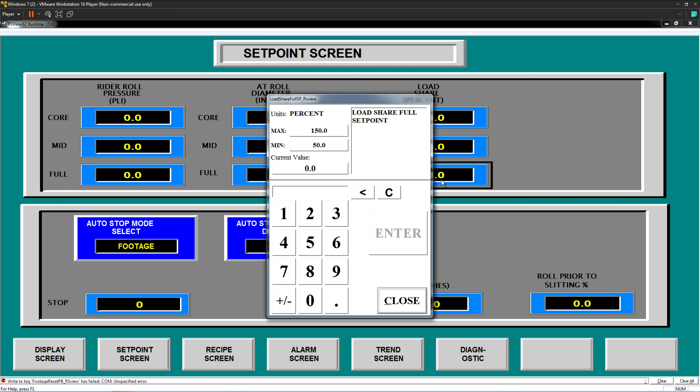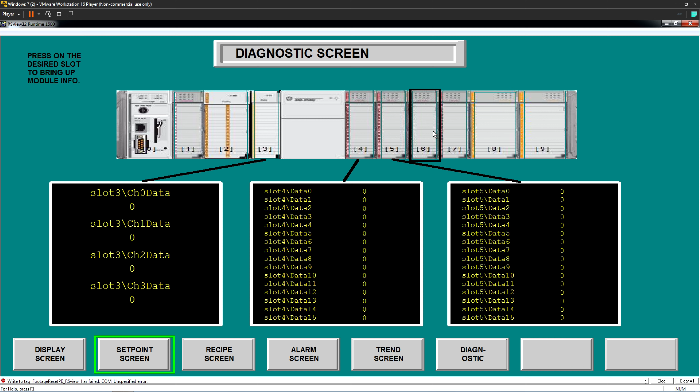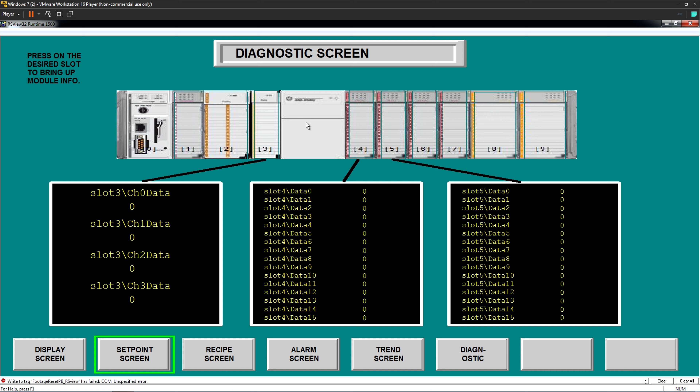You've got what slot, you've got what channel, and you've got the data, but when you look at your digital inputs, you've got slot and channel, and whether it's on or off, but you have no idea what that is. It's a guessing game, same with your outputs, as to what it is. I mean this is a high-speed counter, and it says count, but you really wouldn't know that. You wouldn't know that this is an analog input, other than looking up here at the picture, which isn't real clear anyway, but I digress.

Anyway, so what we'll do is we'll pop over here to the C-More software. So here's what I did. Now this is a pop-up window - it has to sit there, but we'll go into simulate mode here in a minute and I'll show you exactly how this runs. But what I want to talk about is some of the more in-depth features of the C-More.

What I mean by that is like the event manager. Now I only used it in a couple places on here, but it was able to solve a couple problems and make things happen the way I needed them to. I'll show you the screens first - this is your display screen. Like I said, this is a pop-up screen. It's just there. It's not there when we're in actual running.

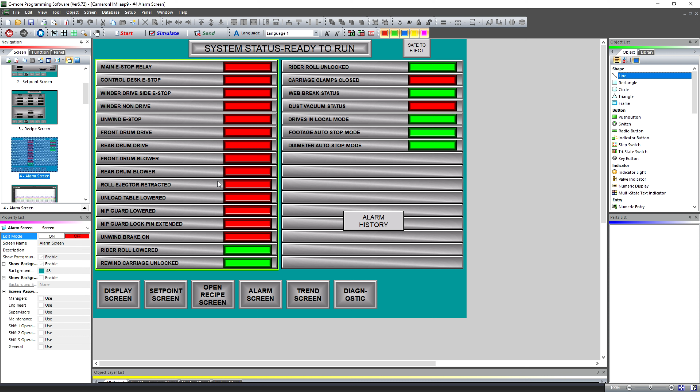The set point screen, well, I'm going to have to - my bad, I'm not in simulate right now. The set point screen looks like this, pretty much like the other one did. The alarm screen looks like this, pretty close to what they had, and the same stuff's there, but a little flashier, looks a little better I think.

I did build a trend screen, the calibrate screen. The diagnostic screen's where I really kind of went above and beyond.

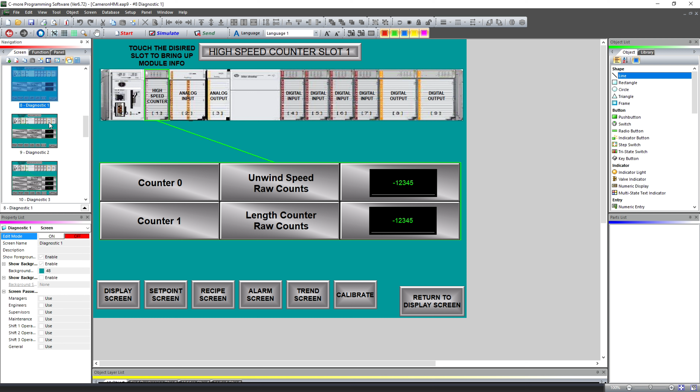So granted, I've got 9 different screens for this, but behind each of these there's a hidden button, and I overlaid the text to let you know what each one is. You've got a high-speed counter, analog input, analog output, digital input, so on and so forth. For each one of those, I did a different screen, and you can see it's telling you what it is, telling you what specific data you're looking at, and so on and so forth.

And when you get down into your digital inputs and outputs, I tried to give more data. Basically, it was so arbitrary on that other one - yeah, you'd know whether that input was on or off, but you didn't know what you were looking at. So if something wasn't made, you were kind of in a guessing game or having to jump to documentation to figure it out. And I think this makes it a whole lot cleaner.

And this is that actual pop-up screen that we saw on top of the display screen. So if we go into simulate, it'll pop up, and I've got it up here on another screen. I'll bring it down where I can trigger and change values and whatnot while we're simulating.

The big thing I want to show you, and it's nothing that can't be done on other HMIs, it's just the way to handle these problems in the C-More.

If we look over all the screens, the first thing I'll point out is whenever you hit that reset footage, you get that pop-up. You hit yes, it resets the footage and goes away. You hit exit, and it just goes away.

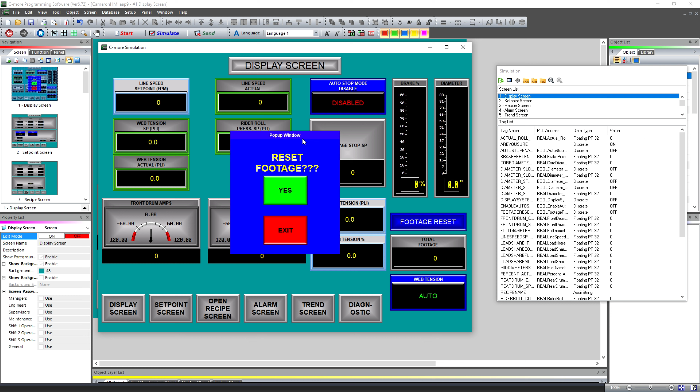Doing that was actually a little bit of a trick. So we'll go back into the program real quick here. Turn that off for a second. Your footage reset button is actually a push button, and it's triggering an internal tag. Let's go with internal, and it's called Are You Sure.

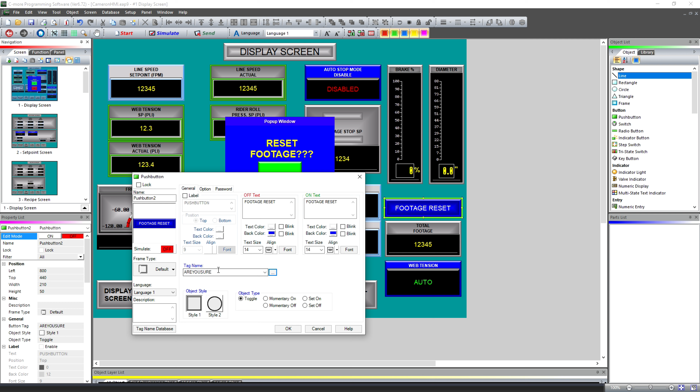It's an internal discrete tag, so it doesn't go to the PLC. It's only in the database inside of the HMI. So whenever you push that footage reset button, I'm toggling that Are You Sure bit on in the HMI. If you come up here to this pop-up window, you'll see what turns this pop-up window on is that Are You Sure bit.

So when you hit this button, your footage reset, it triggers that Are You Sure bit, toggles it on, and pops this up. So down here, on exit, all I'm doing is toggling that Are You Sure bit off. Simple, because that will make that go away.

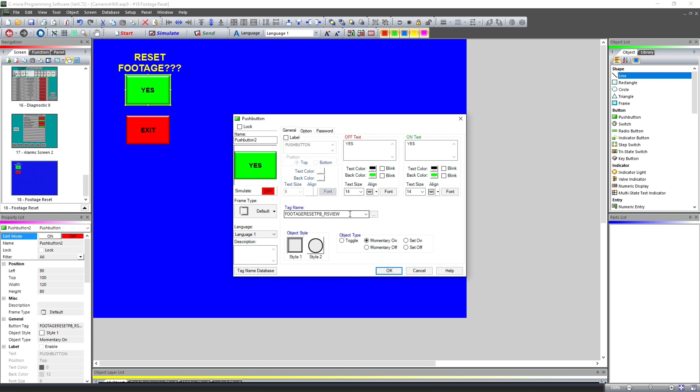But on your footage reset, we need to actually reset the footage, right? And that's a momentary, that's not a toggle. But without some additional action, we wouldn't exit from that pop-up. The pop-up would still be there because there's nothing telling it to go away. We're not toggling that Are You Sure bit back off.

So what we did there to make that happen, we went into the event manager and hit tag event, and we double clicked here. So when that footage reset push button RSView bit is triggered, it turns that Are You Sure bit off. Simple, I know, but it's a way to make multiple things happen by pushing the one button.

Otherwise, you can't do that. If you tried to put a screen change button there or something along that line, it's not going to work, because the screen change push button is just a screen change push button, and you can only hit whatever's on top. You can't hit multiple buttons at the same time. You get what I'm saying.

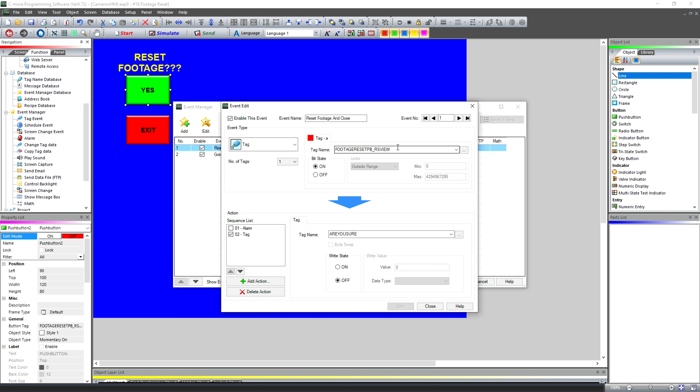But this here, when this bit goes high, the footage reset bit goes high on, it toggles or turns this Are You Sure bit off, thereby closing that pop-up window. I hope that makes sense. And once again, this one simply toggles that Are You Sure bit, which is what brings that pop-up, off. So it was a way to make sure that you're able to reset the footage and you're able to back out of that screen whether you hit yes or you hit exit.

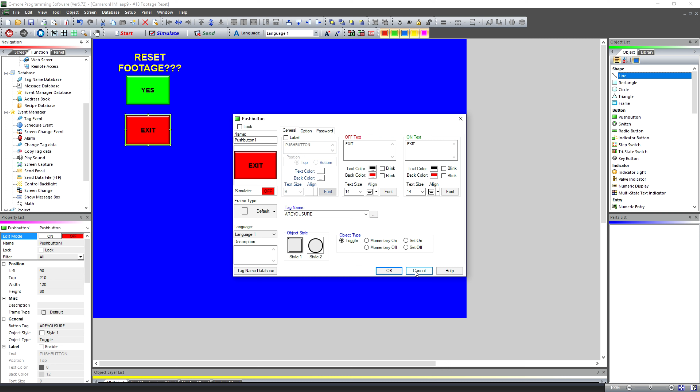Okay, so we're going to go back into Simulate real quick. And a problem that I didn't even know existed on these HMIs until I wrote this one and we started testing it, me and the operators.

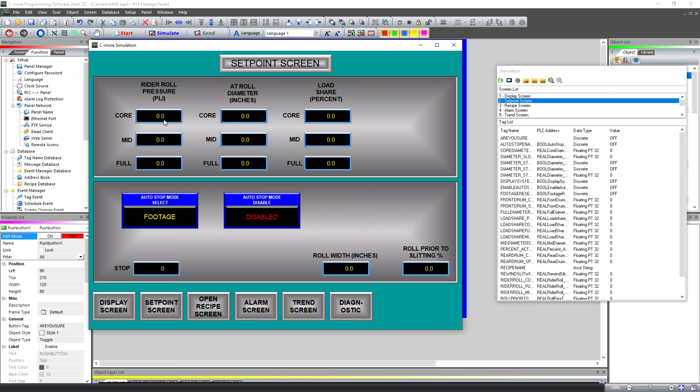When you open a keypad on these HMIs, let me actually go to the set point screen and do it. When you open a keypad like this, that keypad is now a new window popped up over the top of the set point screen window. So this is a window all its own.

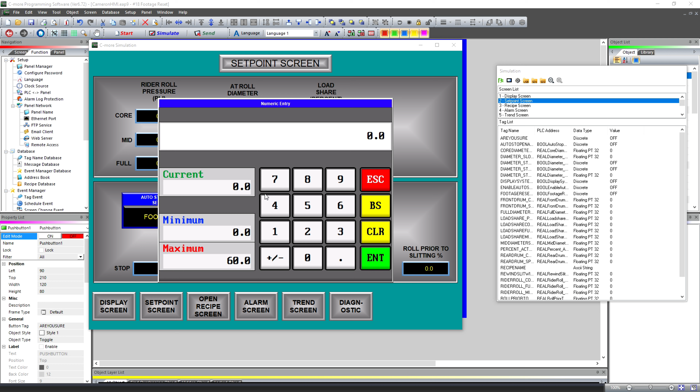And what I didn't know until this project, because I'd never run across it being a problem before, is everything behind that freezes. Now on here there wouldn't really be any live data because this is just set points, so it's not a problem. But if there was live data back here, it all freezes because this becomes the active window. So everything behind, on the screen behind the keypad, freezes right where it's at. Now once you hit escape, it'll instantly catch back up.

And on the display screen, the problem they had with that was they needed to be able to see this total footage when they come up here to line speed, because they'll start slowing down once they get up to a certain point because they like to run in manual. So what I did, if I hit this, you're going to notice something a little weird.

You're going to see a keypad pop up that I actually built manually. Notice that this display screen came up, but it's kind of popped down and you can kind of see the other one behind it. Well, this whole screen right here is a keypad. It's designed as a keypad. The keypad portion is here, but all of this back here is part of that keypad screen. And I'll show you how I did that.

But what that did, now when you pop that keypad up, everything back here stays live. You can still see your diameter coming up. You can see your total footage coming up. Everything that's showing live data that's not blocked by the keypad, obviously, you can still see. You can still see the amperage on your motors down here.

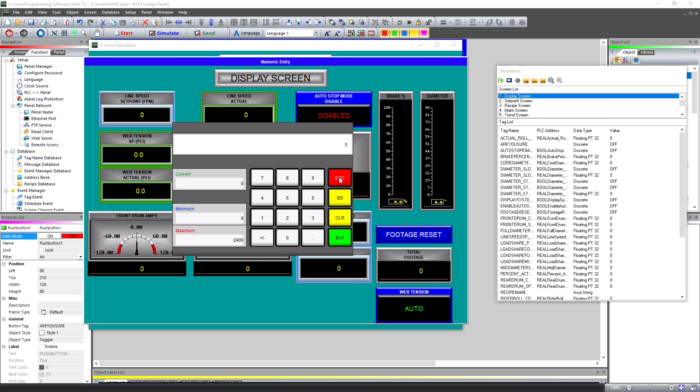And it kind of stumped me for a minute because they said that they had that problem on the old RSView program at one point, and then they had updated the computer or updated something. This was prior to me, and it went away, and it started staying live behind the keypad. So I had to figure out a way to fix that.

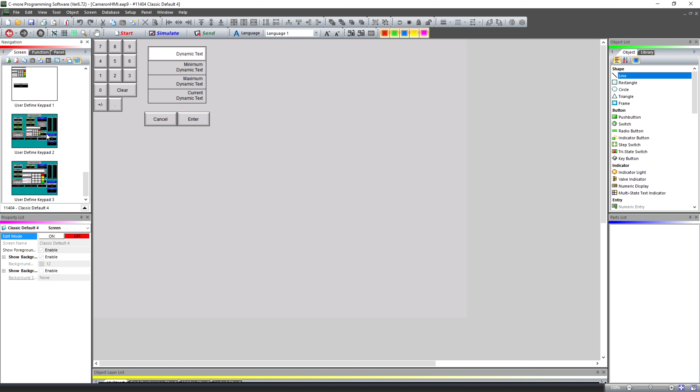What I did, if we come back over here to screens, and over here on the left here, that's your user define keypad. So all of your keypads are in here. You've got default 0, 1, 2, and so on, and then you've got the classic style, which looks a little more like an Allen Bradley. And then if you get down here at the bottom, you'll notice I built two. This one here was the first one I did, and we have one operator whose eyesight's not the greatest, so he needed this to be a little bigger. And I built this.

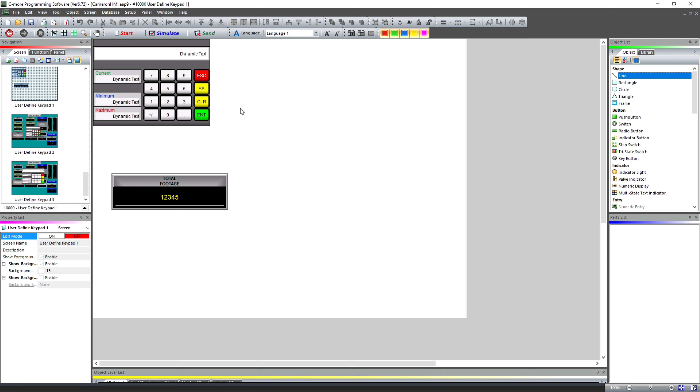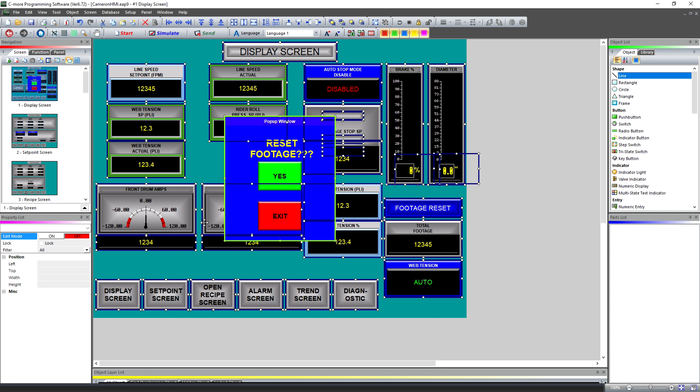But literally what I did, and I'll even show you here, we'll leave that keypad for the moment. We'll get rid of this. We'll go back to our display screen and we will grab everything. Now it's not going to grab that pop-up because that's a completely separate deal. But we're going to copy that whole screen, every element on it. Now we'll go back over here to our define keypad and we'll come down here to that user define keypad 1 and we'll paste that entire screen just like that. So we just duplicated that screen. Now I'm going to undo that for a second just to show you something.

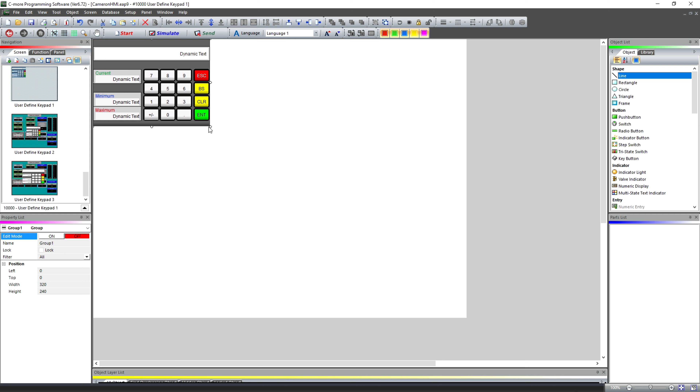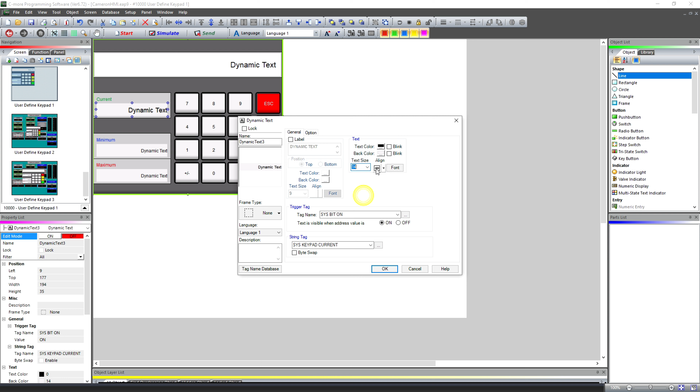We want to take this, we want to right click, and we want to group everything in it. That way we can blow it up bigger. And then the best way to handle it is to go in and change all of your text sizes to something a little bigger. And your number sizes, I'm not going to do all of them right now, I'm just kind of showing you what I did. And I actually usually go in and change the font. I get rid of the default font and I make them bold. Makes them stand out a little better on the screen.

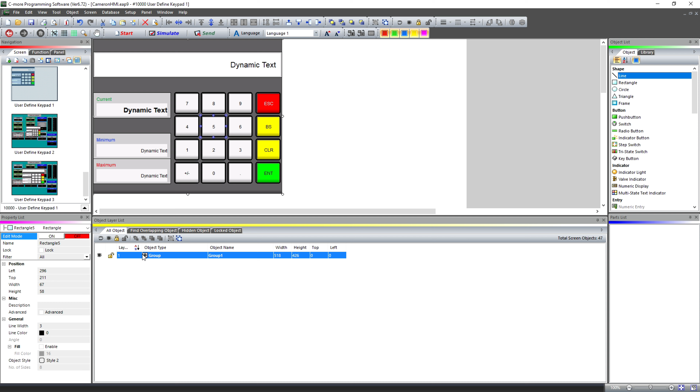You go into your number here. That's going to pop up the rectangle because the rectangle's on top. So what we'll do is we'll pull up our display list just to show you how to do it here. We'll blow out that group and we'll go into key button, double click it, and that's the plus minus key. We'll make that bigger, make it bold.

And you just go in and do that with each one. See, you can get to everything right down here in this pop-up. We got the other key buttons down here. Double click it, you'll see which one it is. That's the 5. Make the number bigger. Go in if you want to make it bold, if you want to italicize, if you want to change the font. You can do pretty much whatever you want. There's a lot of power and a lot of functionality in here, but you see the difference. You see how it's going to change once you get all of those done.

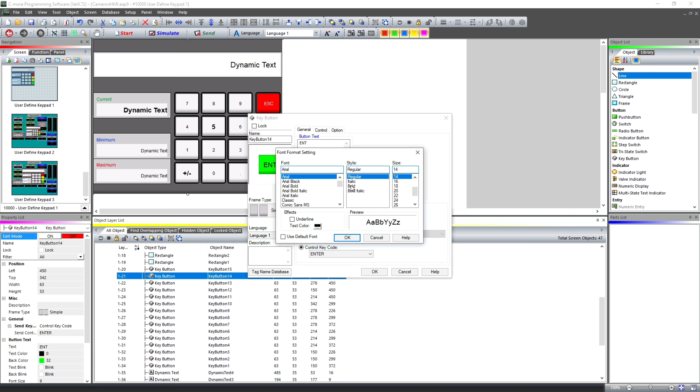I don't know why I double clicked that. Let me find one of those colored keys over there to the side. Oh, sorry, those are all numbers. And they must be up here. Nope, it's got to be one of them. Let's see, let's go down through here and find. There's one. We'll do the enter key just to show you what it looks like on there. Make it a 14, make it bold. And you can go in and change your initial preferences on this kind of stuff. I just kind of leave it and change it as I go. But you see where I'm going with that. So we'll drop this back down out of the way.

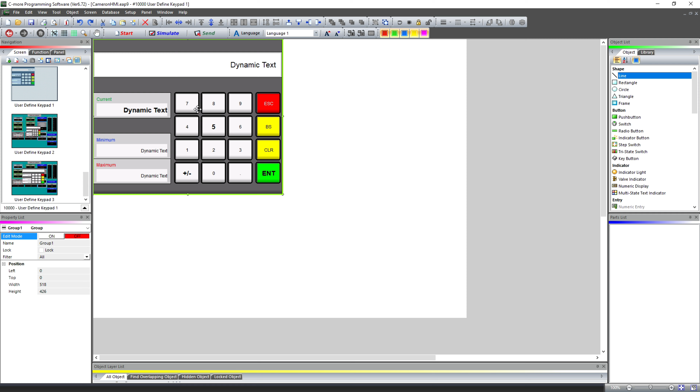Okay, so before we paste all of our other stuff in here, we'll go ahead and drag this down to the middle. But what I want to do right now is get it where I want it, sized how I want it, and then we will go ahead and paste. You'll notice that it's all going to be up on top of there.

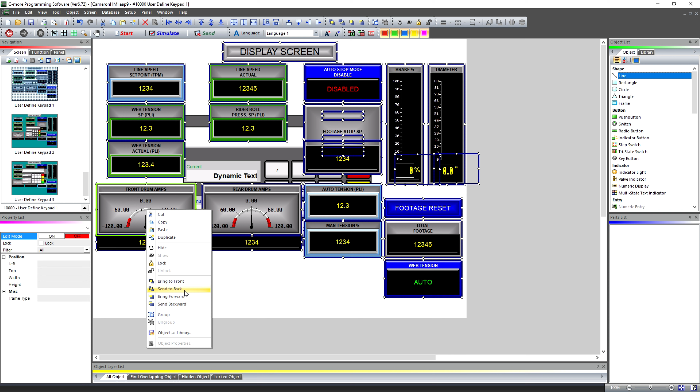So before we undo all that, we're going to right click and send that to the back, which will bring our keypad to the front. Then we can move our keypad where we want it. That's literally how I built that custom keypad screen so that the data would stay live even when the keypad was popped up. That was just to show you how I built it.

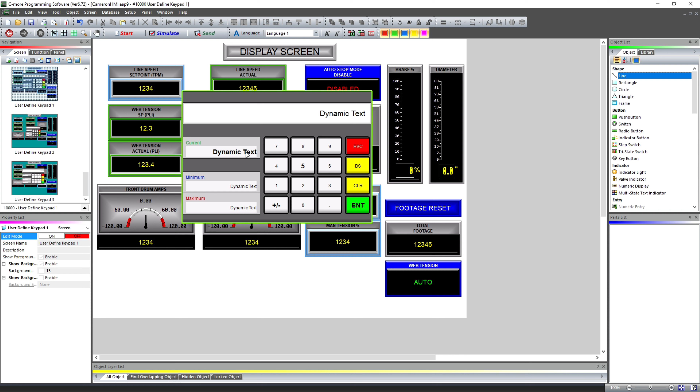And it ended up looking just like this. Wait a minute, is that the one? Yeah, I don't have my most recent saved copy on here because I did go in and change all that text after the fact. It's all bigger now, much, much bigger. I thought I had the most recent version saved on here, but apparently I don't. On the actual HMI that's in production right now, it is bigger text and it looks really good.

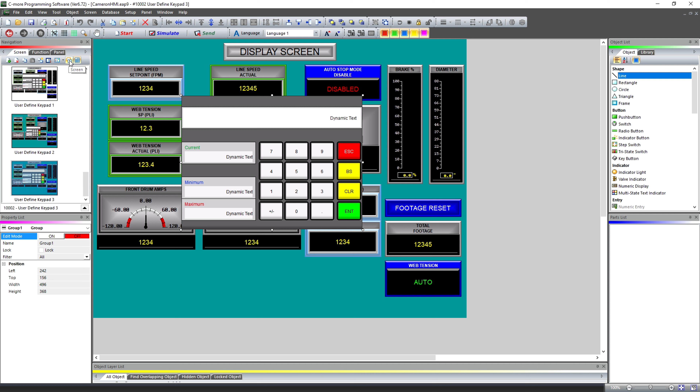Now you'll notice here this percentage is smaller than it is on my actual display screen. That's something else they wanted changed. They wanted that to be a little bit bigger, and I made that change for them. But the big thing here was working side by side with the operators, making sure everything was the way they wanted it.

Had I had the old project file, it would have made life a little bit easier, but even on some of the tags, I had a little bit of trial and error. Luckily, if you go look at the tag database, whoever wrote the PLC program did a really good job of linking their RSView tags, because they literally put RSView behind all the tags they were using in the HMI, which is nice. It made it a whole lot easier for me coming behind way after the fact and reverse engineering this.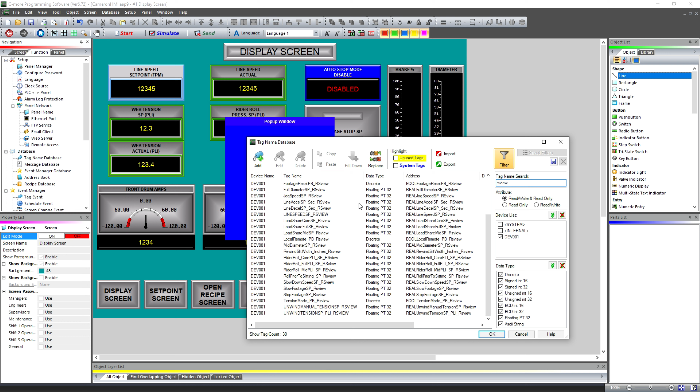Now there was some data and some Boolean tags and whatnot that weren't descriptive with RSView, because we're just reading all the I/O for the diagnostic screens and whatnot. You're just looking at the actual Boolean tag, the input, the output, etc. But this made it a little bit easier on me to go in here and get everything lined out.

Now, another problem that showed itself on this, and I hadn't run into before, and I learned a little something: this disable exponent notation right here under the panel manager. So most of these are 32-bit floating point integers. The tags are. If we go in here to the tags, you'll see a lot of floating point 32-bit integers.

And the ones that do have decimals in them, and most of these have been changed in the most recent revision, but if I had a big decimal, less than 1 but more than 0, I would get that notation, and it just looks really weird. The operators were kind of freaking out because it was showing that exponent notation, so you'd have a series of letters and numbers and a dash or whatever it was. It looked really weird. Granted, it didn't hurt anything, but it didn't look right. They want to see whole numbers. You come in and flip that disable exponent notation on, and it gets rid of that. Makes it pretty easy to deal with.

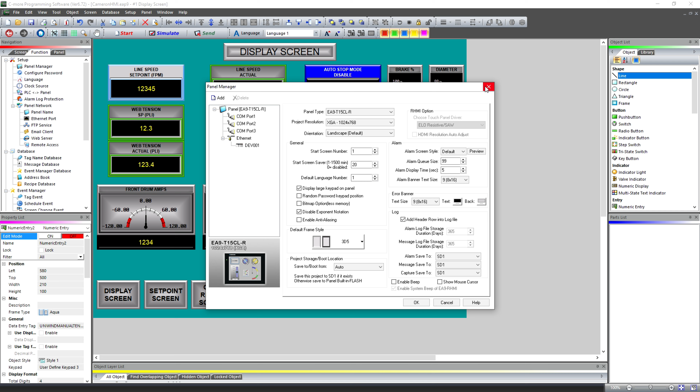But they also had me change the screensaver time on the most recent one. They wanted it 30 minutes instead of 20. But the bottom line is, when you're doing something like this, those operators are the ones that spend all the time with that machine. Sure, they're not controls guys, but they know what they need in order to make that machine run. They know what they're used to.

And you saw this compared to the old RSView program. I kept it pretty similar because I don't want them to have to relearn everything they've been doing. Some of these guys have been doing this job for 20 years. It's not about them being resistant to change, it's about keeping their workflow cohesive. They shouldn't have to make major changes. We didn't install a new machine, all we did is update the HMI.

So I hope I've showed you a few of the little tricks, I guess you'd call them, on here.

They're very powerful screens. They really are, and they can do a lot. They can do just as much as any other HMI out there.

Here was another thing with the event manager. I had told you earlier that if they try to start the machine and one of their clamps isn't closed or something like that, they need it, they're used to it. The old version would pop straight to the alarm screen so they could see what they're missing.

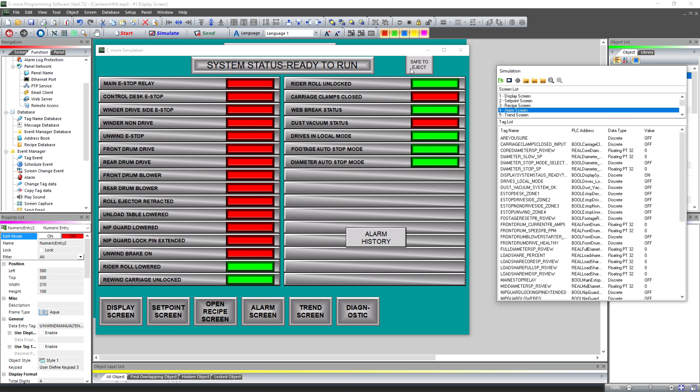Say their carriage clamps aren't closed, or the dust vac is messed up, or e-stop, or whatever it is that's stopping them. It automatically goes there, and all they got to do is glance at the screen, and they can see, oh wait a minute, I forgot to close that clamp. Then they can go back to their display screen and run.

It's pretty straightforward, but you see this footage stop set point here. Well, if we switch to diameter stop mode, wait a minute, diameter stop mode select, you see that changes. So I've got the visibility on this triggered by that tag, so that is only visible when they go into diameter mode.

There's also some red slow and stop text that pops up here. If they're in diameter slow mode, you see this flashes slow mode. I didn't even know that was there when I first started building these screens. Diameter stop mode, same thing, and I had to find that out by watching them run and seeing it happen.

In the beginning, they typically run in footage mode, so I wasn't even aware in the beginning that this diameter mode that looks like this was there, because on the screen it always shows footage stop since they typically run in footage.

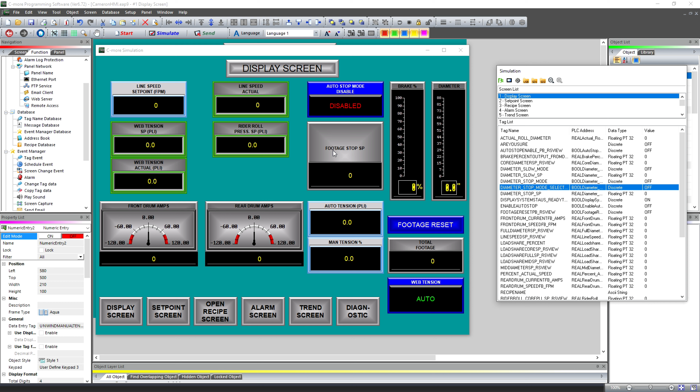Now, when I looked at the version of the program on my laptop that I pulled out of the panel PC, it showed diameter mode, but watching them run is how I found those little red pop-ups and things like that. You've got to, when you don't have the old project file, just take the time to figure that stuff out.

But to show you how I did that right there, on any element that you put on here, you can put a visibility tag. So that is only visible when diameter stop mode is not selected, as you see right there.

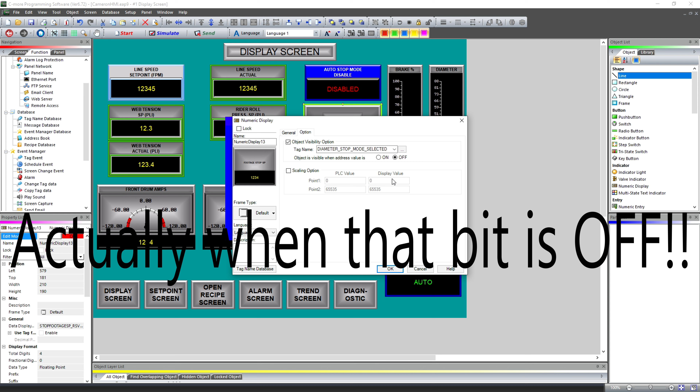And you can mess with the scaling and whatnot too. You can make the display value show different than the PLC value if you want to scale something different in the HMI than it is in the PLC.

In that event manager, if you really want to get under there and really start breaking stuff down, there is a lot you can do. You got your tag, you can add multiple tags, and you can even do logic right here in the panel. So when certain things happen, when these tags are in whatever condition, whatever logic orientation you want, you can make them trigger another tag. Or in this case it's an alarm, but you can add an action here.

You can do math, you can do a message, the backlight, you can do a screen capture. So if something happens, it'll do a screen grab and save it to the SD card in the panel. You can do a screen change, trigger a sound, copy a tag. You can really use this event manager to make pretty much anything happen that's not available traditionally inside the objects you're putting on there.

The math and things of that nature are, you literally just type a formula in right here, whatever it is, and then you throw the result in whatever tag you want to, whether it's an internal tag or a PLC tag. You can do math and logic and things like that right inside the panel.

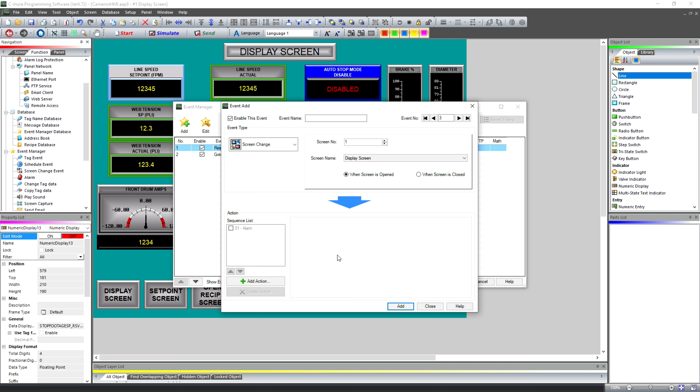But the bottom line is there's a lot of ways to do everything you want to do inside these panels. Don't take away from Automation Direct's panels just because they're online, I mean, the 15-inch HMI I put in down there was $1,700.

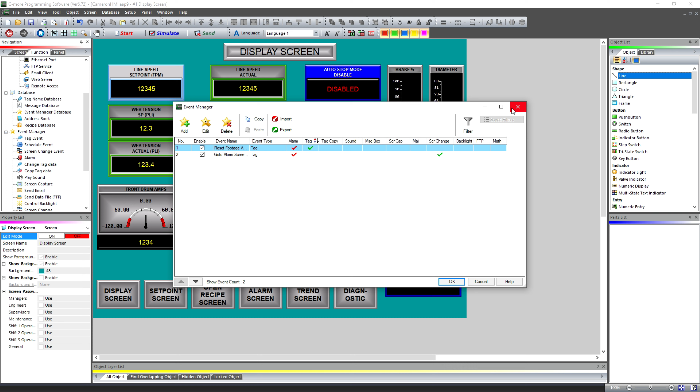There is so much functionality in here, so many things you can do. It's insane, it really is. I'm not saying they're better than any other HMI on the market. They all have their strengths. I used a Beijer HMI a while back that was phenomenal. The software cost a bit, it wasn't free like the C-More, but it wasn't prohibitively expensive either. Bottom line, they're really good panels.

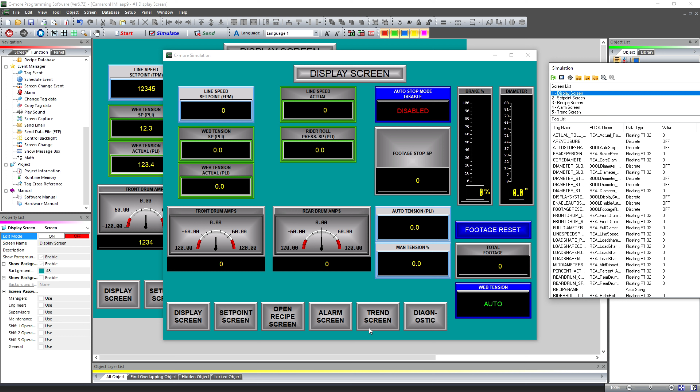One other thing I thought about is I did have to password protect one screen here. Granted, they typically have a pretty basic password, but in order to get to this screen you have to put in a password. How did I do that?

Well, we will go to that screen, which is the calibrate screen right here. And if we go to screen options, you'll see password. Now I have general on there. You hit configure password, it'll pop up and you can put in whatever you want that password to be for that specific level, be it managers, engineers, supervisors, etc. And you can change those names.

You can also make those a tag, be it internal or in the PLC, so that they can set their own password. You don't have to do this static password. You can make it a tag, and you can create an event where, based on a date, they have to change their password, or on their first login they have to change their password.

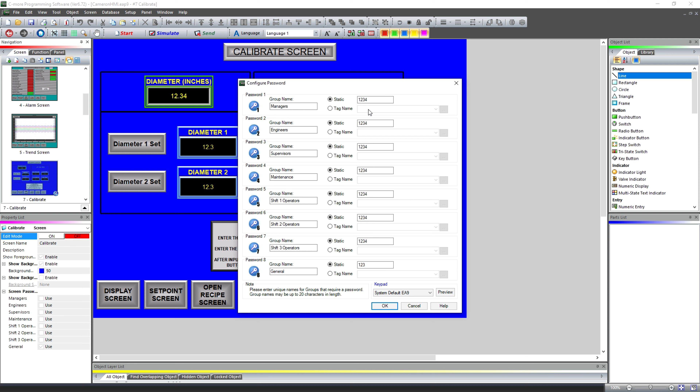That is all doable. They're a very capable HMI, and Automation Direct doesn't pay me to do these videos. I've been using their product a lot, and I still use a lot of Allen Bradley stuff as well.

But the beauty about this is talking to an Allen Bradley PLC. Whenever you first set one of these up, it's simple to import your Allen Bradley tags, be it an L5K file or an L5X file. You make a new project, you come down here and select Allen Bradley, and in this case it was a CompactLogix Ethernet. You do your protocol setup, put in your IP address, and then you just import your tag database as an L5K or L5X file, and you're done.

The protocol's there, it's going to talk to the PLC, it's going to do everything it needs to do. It's not complicated. I showed this once before on another video, but there are quite a few protocols in there, and it's got Modbus. So if you've got a PLC that's not directly supported by the C-More, you can always use Modbus to talk to whatever you want. There are a lot of devices out there that speak Modbus.

We'll wrap this up, I'm getting a little long-winded, but I just wanted to dig a little deeper into the C-More and show you some of the more advanced features that are available, just to show you that these things will do just as much as just about any other HMI.

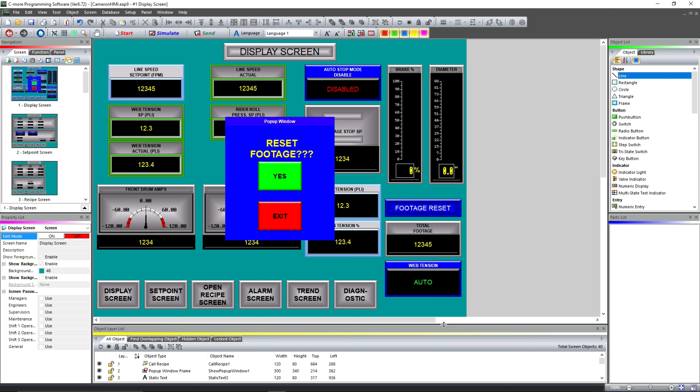I don't know if I showed you this before, but this is where you change the background color of your screen. Right now I've got it set to 48. If I want to change it, I just hit OK, and you see it changes the background color. You can change that background color to anything you want, put a bitmap back there, do bitmap buttons. I've used a company logo for a former employer so a welcome screen would pop up, and you touch that logo to take you to your first screen.

The mind boggles at the options that are available in here. It really does. They're a good panel, a very good panel. I guess that's all I've got to say.